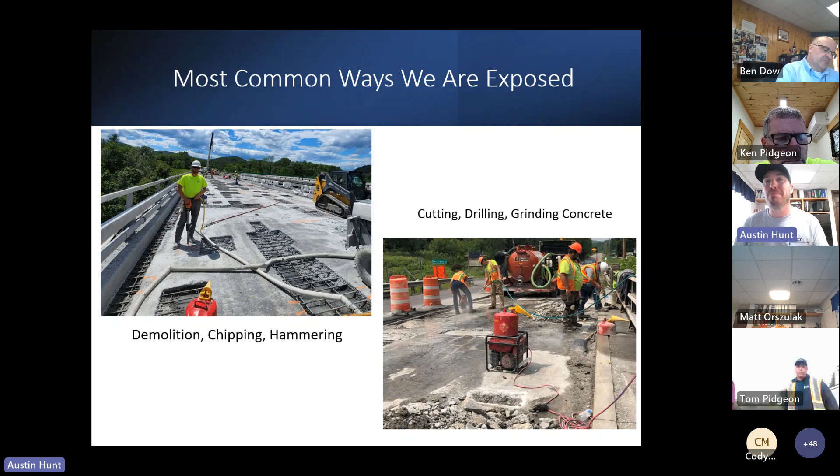We hole cut into structures, things like that. Silica dust is in any earthen, stone material, concrete. It's one of the most common minerals in the soil - it's in everything.

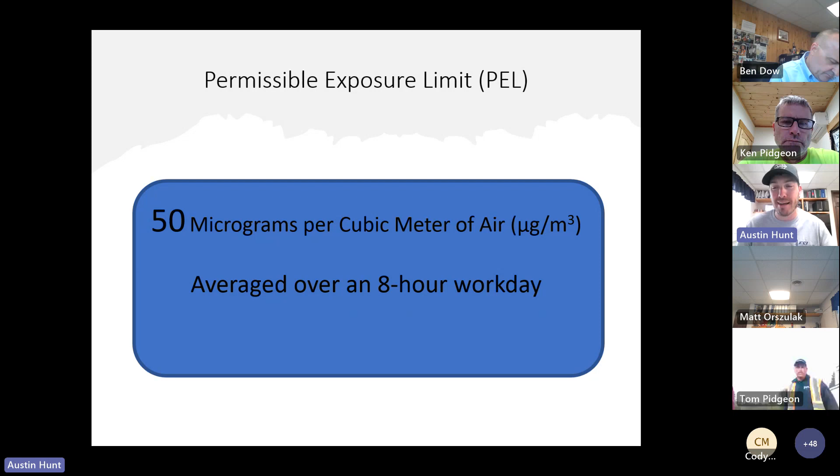So the permissible exposure limit is 50 micrograms per cubic meter of air over an 8-hour day. And for most people, they just see that as a number - they're like, I don't know what that means. So the next slide here helps get a good perspective on it.

Hey Matt, can you mute the tool crib? What's that - can you mute the tool crib? I think it's Todd Nelson. Okay, yeah, I'll mute him. Okay.

Thanks. All right, so what I was saying is 1,000 micrograms of silica here - to the left is next to a dime. They're showing it, and that is a very small amount of silica.

So in 20 cubic meters of air, which breaks down to about a 10 foot by 10 foot by 7 foot room for us Americans, that amount of silica in that room means you can be in there for 8 hours a day and no more. A lot of times silica is just one little part of all the dust that accumulates, so that room should be very dusty if there's that much silica in there. But it's actually a very small amount.

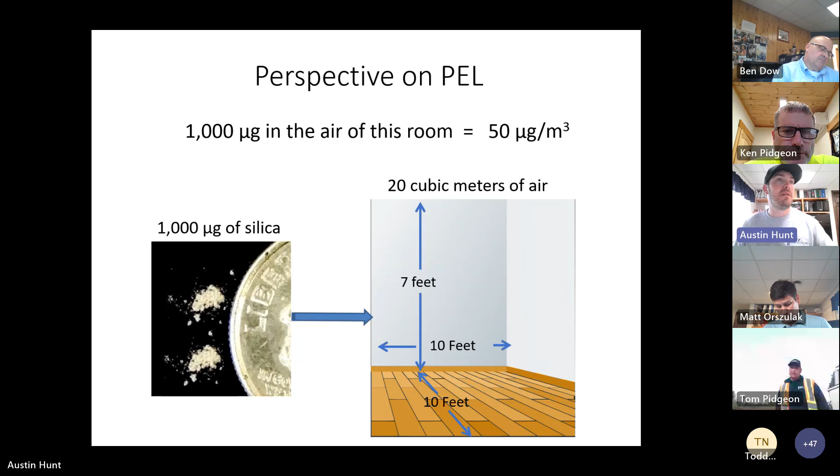So we use this OSHA Table 1 for best practices. OSHA puts this out saying this is what you should do and these are the protection measures you should take. So you can see when you're using a jackhammer or chipping tools...

with the use of water delivery and a vacuum system or something like that, outdoors, you're good to go for about 4 hours with no additional protection. After 4 hours you need an APF 10, which is a dust mask, half face mask, disposable or the reusable ones.

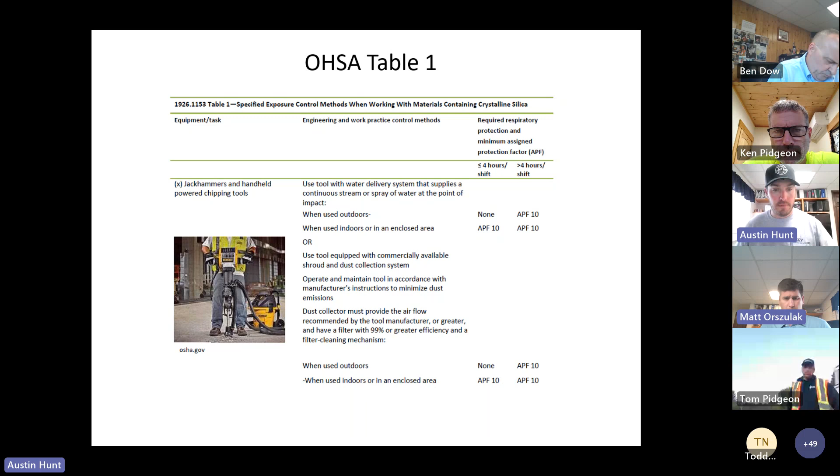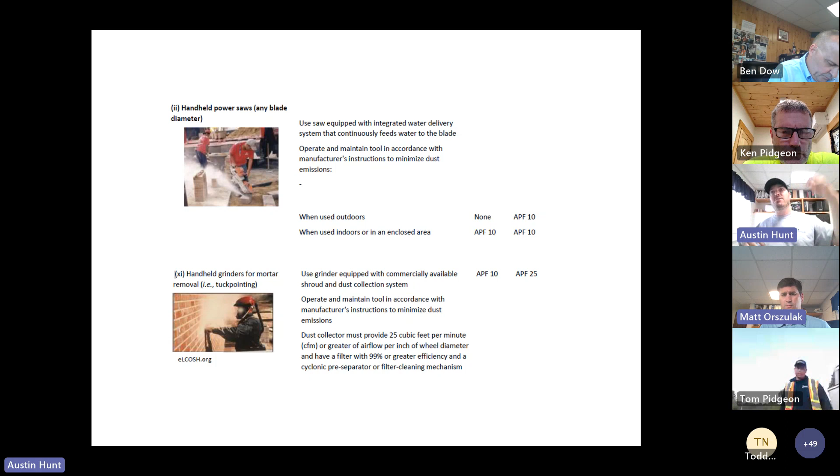So I've got them for saw cutting and grinding. There's 8 pages on this that show most aspects of construction.

So the APF 10, when you see that, this shows what they mean. APF 10 is your disposable respirators, your half face masks, and then above 25 would be your PAPRs with a respiratory hard hat, things like that, and then 50 is a full face mask and so on.

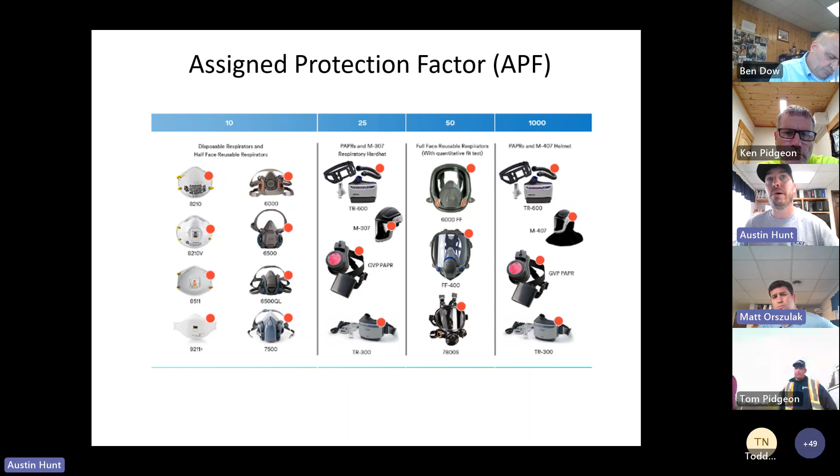If you ever have questions about silica, contact me or Matt. We can come down and test it. It takes us a couple hours to get the test, and then you've got to send it off to the lab, so it's not immediate, but it will let us know better in the future what the levels are.

And some of the health effects, why we don't want to get exposed to this, is you can get silicosis, which is basically scar tissue in the lung that builds up over time, lung cancer, COPD—it's going to swell your airways, you're going to have trouble breathing, things like that. And then finally, kidney disease.

So if you have any questions about what you're doing, you can always refer to that Table 1, or contact me and Matt, and we can come down and test that for you.

That's all we'll have. Thanks Austin, and that's why we built the JHAs the way we did. So if you check that silica box that you have that hazard, that Table 1 shows up. So our best practice is really those two methods: wet cut and vac. If we're not doing those, we must be wearing some type of respiratory protection.

Is there any questions out there on silica? If not...

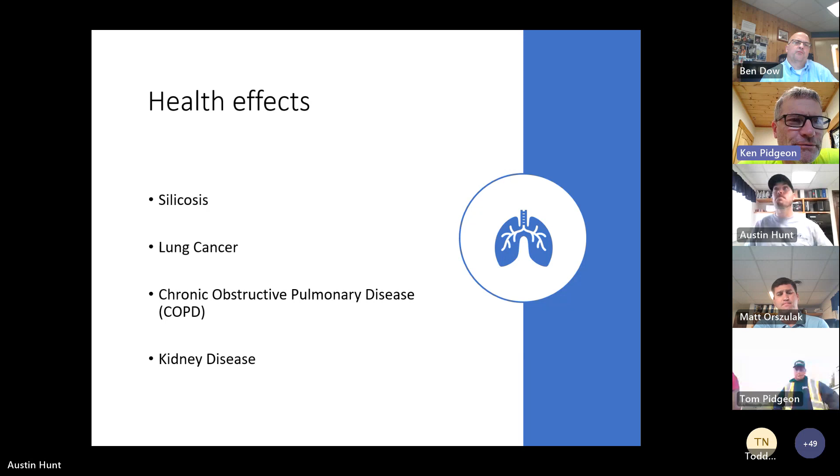Take it away, Ken. You want to introduce your newest safety guy standing there next to you on my screen? Yeah, we want to do that with the photo, or you want to do it right now? Oh, go ahead, you can bring it up. Okay, yeah, so we're pleased to announce...

Tom Pidgeon has joined ECI, and he's helping the safety team. He's going to be out there—he's already out there on the site this morning doing a nice little morning briefing, joining the morning briefing and conducting the morning safety meeting with the crew out at Essex Waterline, with Randy and Jesse and all their crew members. So we're going to have a lot more presence out there, and Tom's going to be leading that. He's a paramedic by trade...

so he's going to really help us on the injury front, helping triage, helping respond. He's also going to learn how to locate and do all the confined space work, and we're going to get him up to speed on all the OSHA requirements, and also be a trainer for us. So we're really excited to have Tom join the team and help us be safe and sound each and every day, because that's our number one priority. Safety is our best priority to maintain profitability and have a very successful company and keep our employees happy.

Yeah, I got a couple things to add, if you don't mind. Go ahead. Tommy, give a wave just so we know you're acknowledging, or is the screen frozen? He might be frozen. I think it froze.

Yeah, not great service over there in Essex. His name is Pidgeon, and he's worked here before. He's also a Marine—he was in the reserves, I don't know if he's in there anymore—but he's highly trained as a paramedic.

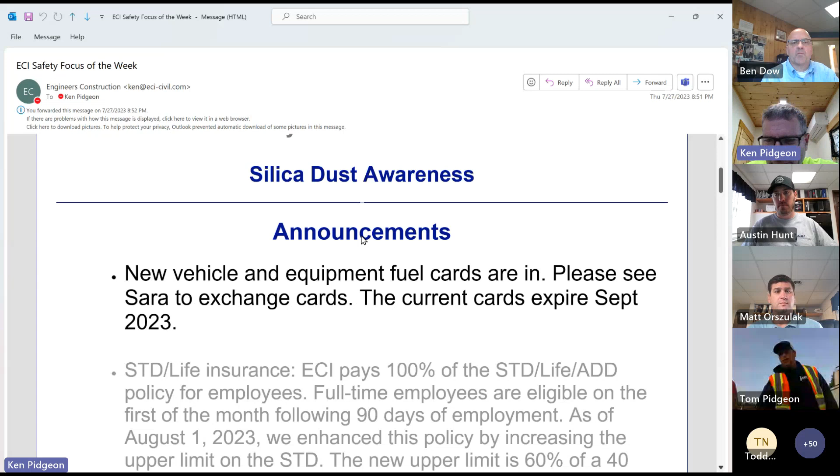Might be a lot that show up on September 1st. Yeah, but don't be that person, right? Okay, I did mine yesterday.

I left the next two announcements on here. The STD, that's short-term disability, and life insurance have some really good changes that are explained. Also, the healthcare premium holiday is still in effect. Both good things.

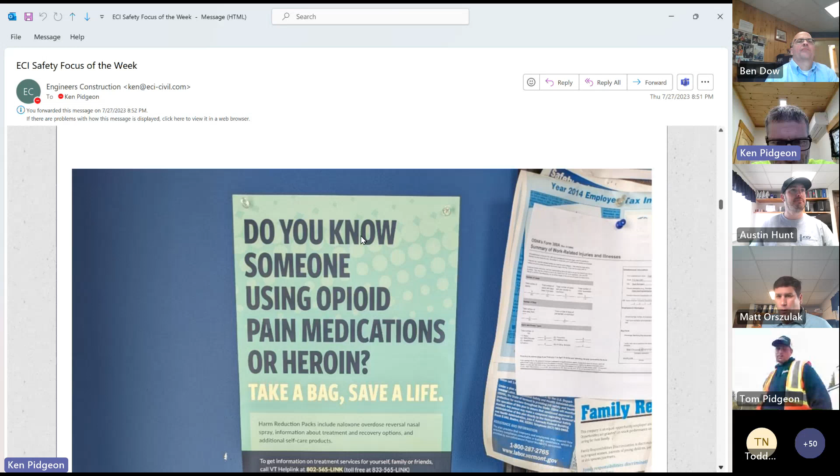So welcome new people. I've kept this item on the email, the free opioid drug help kit located on the side door of the operations building, provided by the AGC and VermontHelpLink.org. If you know someone using opioids, pain medications, or heroin, just take one of those bags. There's a little help kit in there for testing stuff and Narcan and stuff like that. Important stuff if you're in that situation.

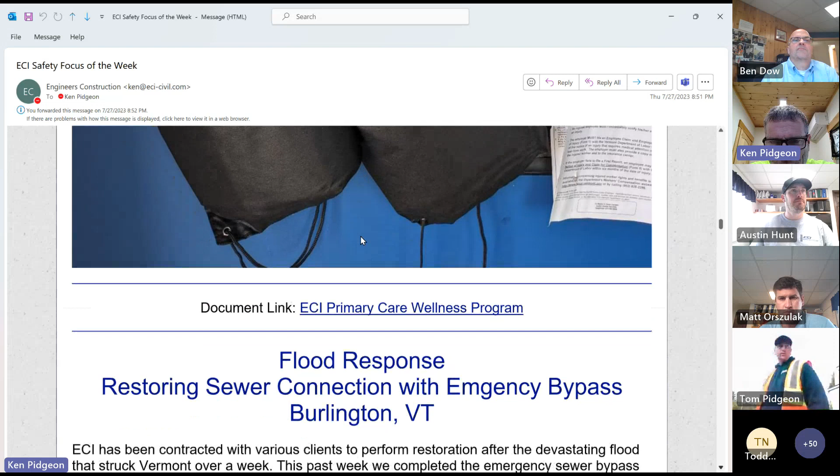I have a link here to the primary care wellness program, so if you're not a participant, please check that out.

And then we're going to talk about the flood response, restoring the sewer connection with an emergency bypass for the city of Burlington. I don't know if Ben Heath is on. Did he want to present here? Happy to, Ken. I'll take over the screen too.

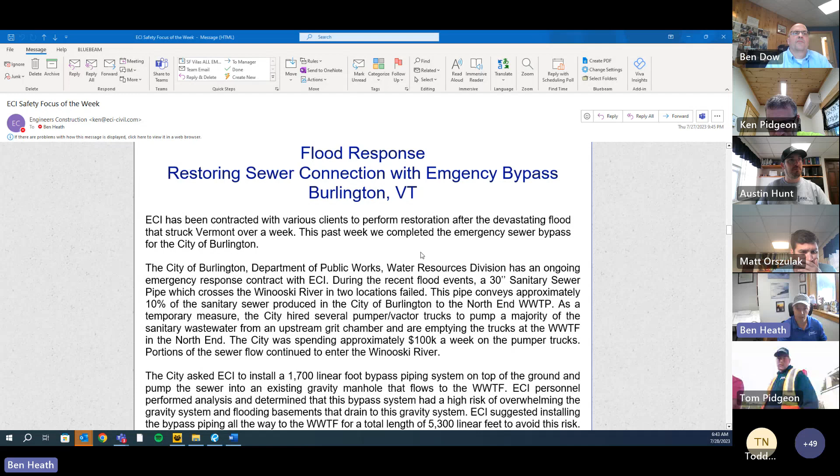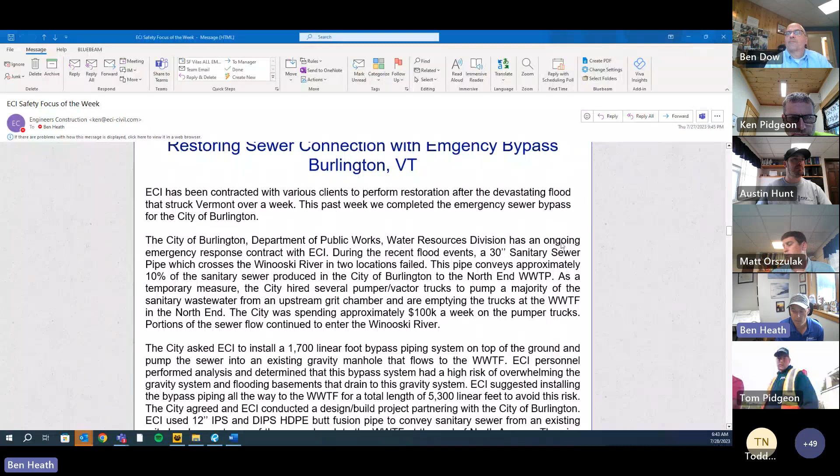So I got to bring up my screen. There we go, yep, okay. ECI has been contracted with various clients to perform restoration after the devastating flood that struck Vermont over the past week. This past week we completed the emergency sewer bypass for the city of Burlington. The City of Burlington Department of Public Works Water Resources Division has an ongoing emergency response contract with ECI.

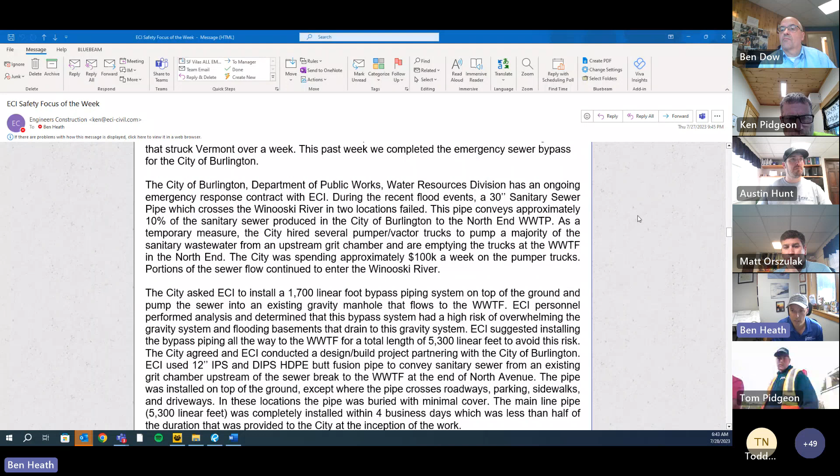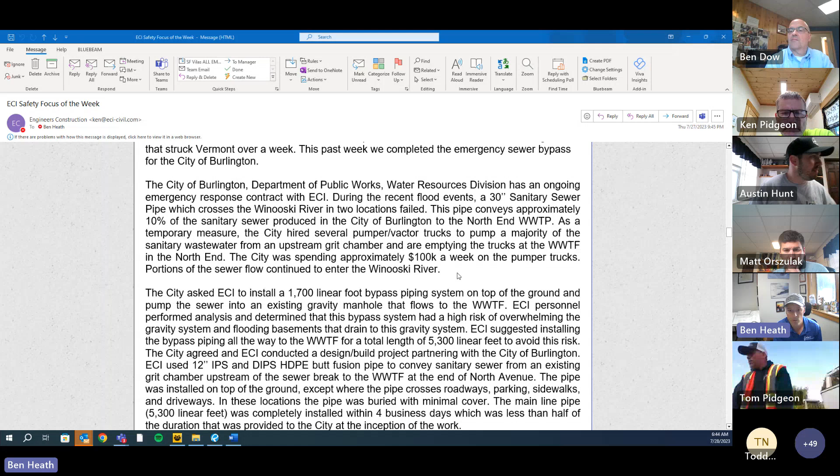During the recent flood events, a 30-inch sanitary sewer pipe which crosses the Winooski River in two locations failed. This pipe conveys approximately 10% of the sanitary sewer produced in the city of Burlington to the North End wastewater treatment plant. As a temporary measure, the city hired several pumper and vactor trucks to pump a majority of the sanitary wastewater from an upstream grit chamber, emptying those trucks at the plant in the North End. The city was spending approximately $100,000 a week on the pumper trucks, and portions of the sewer flow continued to enter the Winooski River.

The city asked ECI to install a 1,700 linear foot bypass piping system on top of the ground and pump the sewer into an existing gravity manhole that flows to the treatment plant. ECI personnel performed analysis and determined that this bypass system had a high risk of overwhelming the gravity system and flooding basements that drain to it. ECI suggested installing the bypass piping all the way to the treatment plant, for a total length of approximately 5,300 linear feet, to avoid that risk.

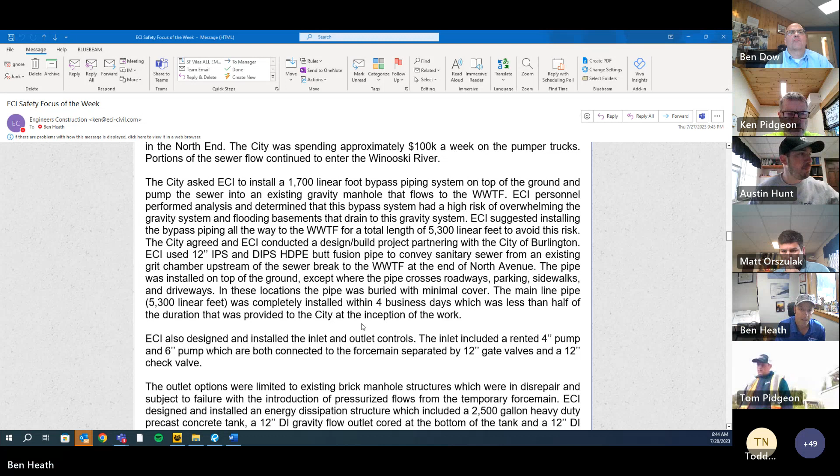The city agreed, and ECI conducted a design-build project partnering with the city of Burlington. ECI used 12-inch IPS and DIPS HDPE butt fusion pipe to convey sanitary sewer from an existing grit chamber upstream of the sewer break to the wastewater plant at the end of North Avenue.

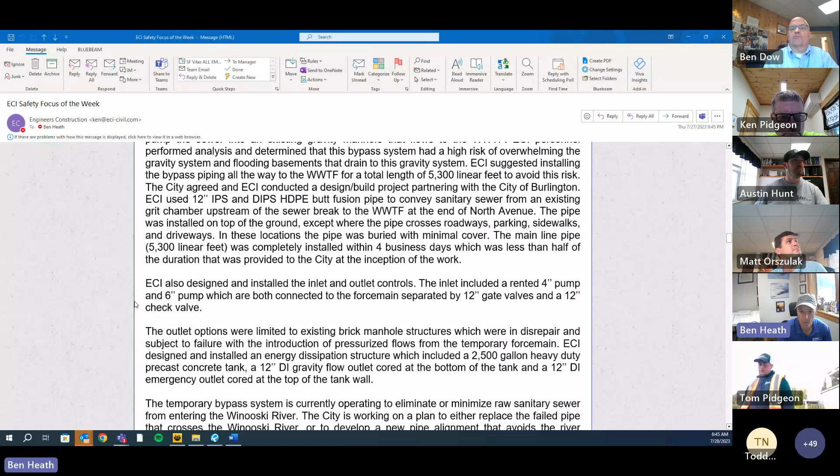The pipe was installed on top of the ground, except where it crosses roadways, parking, sidewalks, and driveways. In these locations, the pipe was buried with minimal cover. The mainline pipe, about a mile long, was completely installed within 4 business days, less than half of the duration that was provided to the city at the inception of the project.

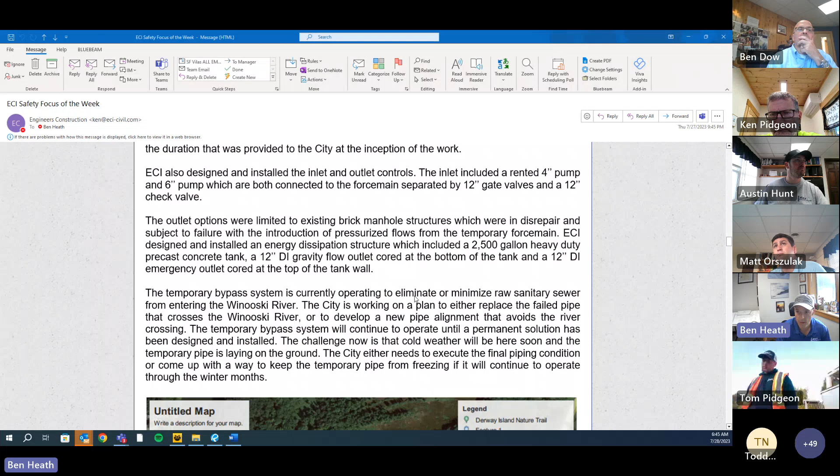ECI also designed and installed the inlet and outlet controls. The inlet included a rented 4-inch pump and 6-inch pump, both connected to the force main, separated by 12-inch gate valves and a 12-inch check valve.

The outlet options were limited to existing brick manhole structures which were in disrepair and subject to failure with the introduction of pressurized flow from the temporary force main. ECI designed and installed an energy dissipation structure which included a 2,500-gallon heavy-duty precast concrete tank, a 12-inch ductile iron gravity flow outlet cored at the bottom of the tank, and a 12-inch ductile iron emergency outlet cored at the top of the tank wall.

The temporary bypass system is currently operating to eliminate or minimize raw sanitary sewer from entering the Winooski River. The city is working on a plan to either replace the failed pipe that crosses the Winooski River or develop a new pipe alignment that avoids the river crossings. The temporary bypass system will continue to operate until a permanent solution has been designed and installed.

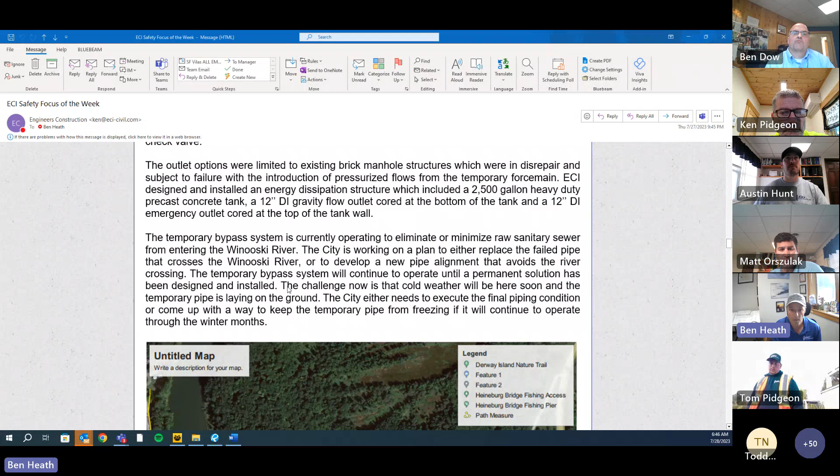The challenge now is that cold weather will be here soon and the temporary pipe is laying on top of the ground. The city either needs to execute the final piping condition or come up with a way to keep the temporary pipe from freezing if it will continue to operate through the winter months.

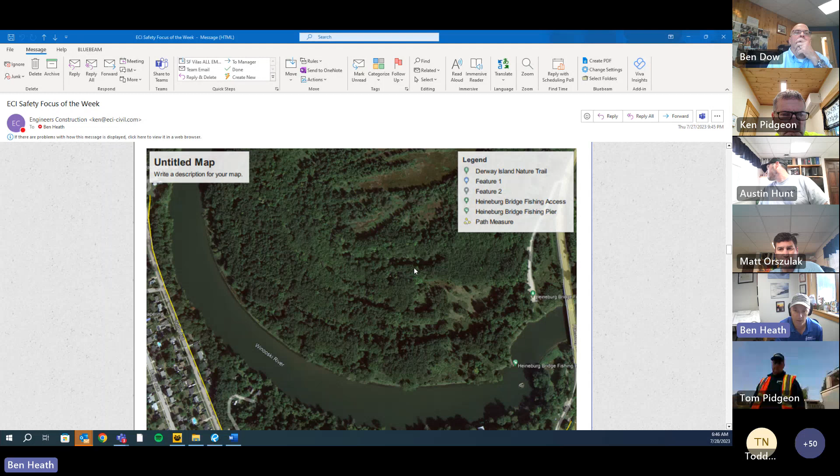I wanted to add to this narrative that this was a real team effort. We were all extremely busy and had very limited availability to assist with something of this size and scale. But the whole team, including portions of the drilling group and the civil group, really came together and scrambled to get materials here as fast as possible.

We got the call late the week of the flooding, Thursday, Friday, and by Monday we were on site with equipment already there and material on the ground, putting pipe together on the first business day available to us to start work. The city was really thrilled, and it was a good example of ECI's ability to respond to a large scale project like this.

This is an ortho photo showing the pipe alignment. On the right hand side of the screen, you can see the beginning of the system where the pumps are located at an existing grit chamber. The existing pipe crosses the Winooski River generally in this location and in this location, and the plant is located up at the top left hand corner. So the goal was to get the pipe from A to B the fastest and least expensive way possible.

We did everything we could to help the city determine a good pipe alignment that avoided asphalt and concrete, and we went through people's backyards. We dropped the pipe in the green belt. We dropped the pipe behind guardrails everywhere we could, and a vast majority of the piping system is just laying right on top of the ground.

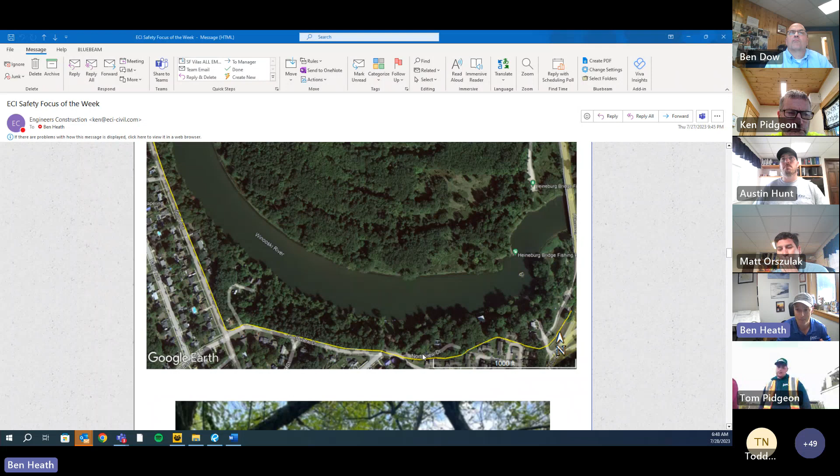Although we had a significant impact out here, we basically took over North Avenue and Northfield Drive and portions of this condominium complex. The neighbors and the folks that live there were extremely nice, and they had an overall willingness to just accept the construction abuse, and they were just happy that we were able to get this pipe in as fast as we did.

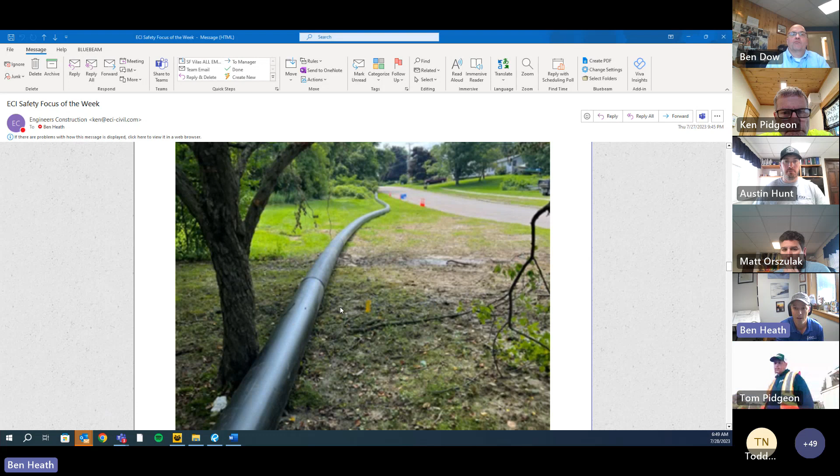This is a photo taken from near the outlet. This is generally where we started the piping work. We delivered the pipe to this location on Monday morning, and this is where we started fusing pipe together. This is a great example of what this looks like. If you drive out there, there's this black pipe just laying on the ground, working its way from the grit chamber to the plant.

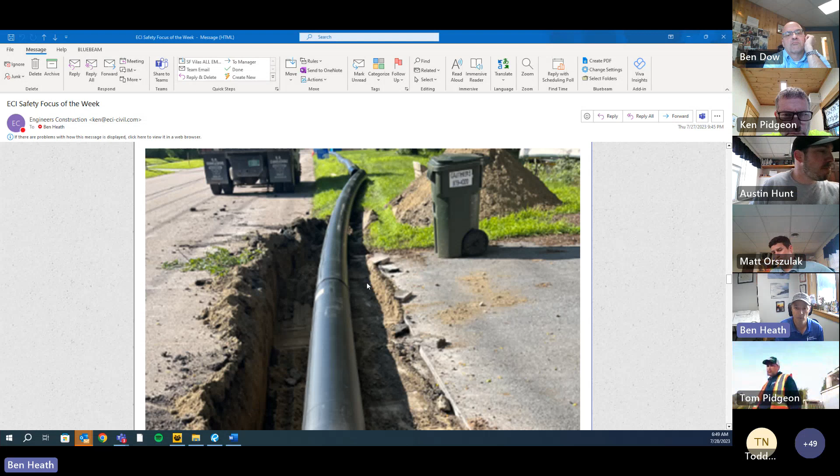Here is a photo of us going across a driveway. In some locations, there were multiple driveways in a row separated by 30, 40 feet. So we just kept the pipe down and dug a trench, getting it in with minimal cover, enough to keep the pipe down and keep the driveway moving forward.

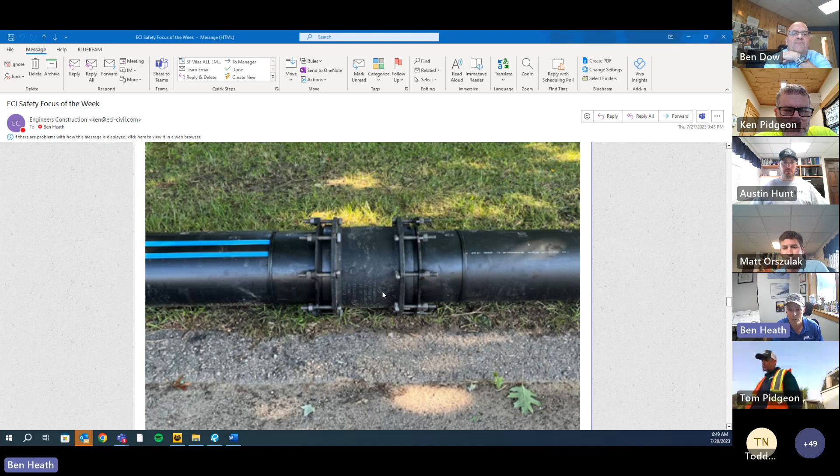We were scrambling to get all the parts and pieces there as fast as possible. On the left-hand side is a DIPS 12-inch HDPE pipe, and on the right-hand side is an IPS 12-inch HDPE pipe. Those have different outside diameters, so we couldn't get all the same pipe on site. We got a little bit of this, a little bit of that, parts and pieces scattered everywhere, and we were able to find enough adapters to make it all happen.

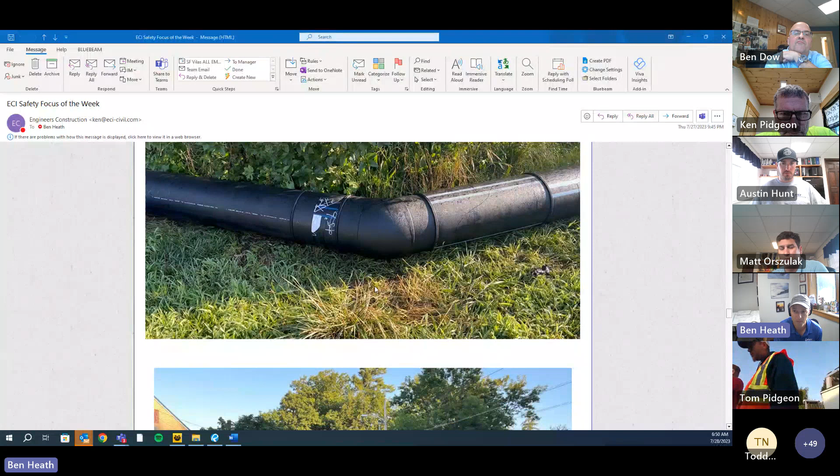Here's a photo of us completely taking over Northview Drive. We've got one lane road ahead. I think that was maybe a false sense of what was happening out there, but there's really very limited traffic on this road. This is a dead end. There's a gate right behind where this photo was taken, but here we are putting pipe together, stringing it out in the road, and eventually burying it through this section.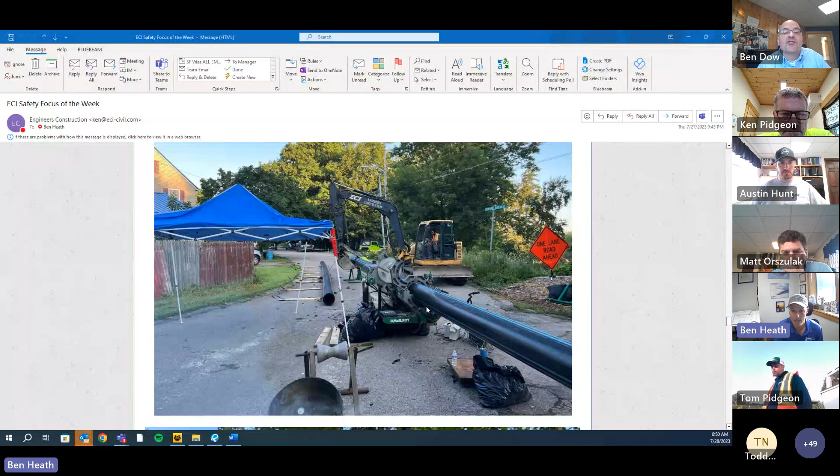So we decided, instead of blasting one of these structures with pressurized flow, that we would discharge to a heavy-duty tank. And I learned a valuable lesson on this one: nearly all septic tanks are constructed so that they have to be buried before they can be filled with fluid. So it wasn't as easy as we thought it was going to be to get a tank here. We actually had to get a thick-walled, heavy-duty tank, and fortunately Camp Precast had one out in their yard that they didn't even know about. Having a good partner like Camp, having one of the leading folks from that company go for a walk and find us what we needed, was a reminder that good business relationships can pay off at times like this.

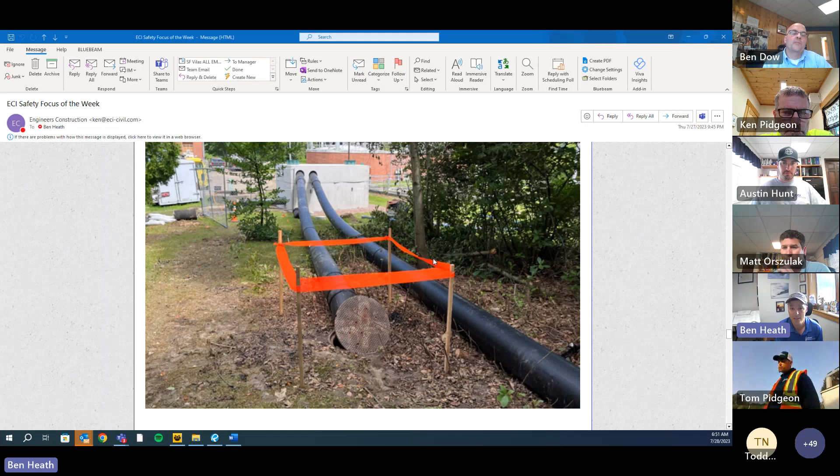So we discharged at the top of this structure. We outlet to the left down at the bottom, and then the second pipe you see coming out is our emergency overflow, which discharges back to this manhole. We don't expect that will ever see any fluid, but we wanted to have some security that we weren't going to inundate this precast tank and have a spill. So, another image of that outlet.

Did you guys core it, or did you have it cored at camp? We cored it on the spot. We had to plug, this was a setup for a gravity septic system, so we had to plug all of the existing booted holes that were in the tank and core our own holes and put our own boots in and make all the connections.

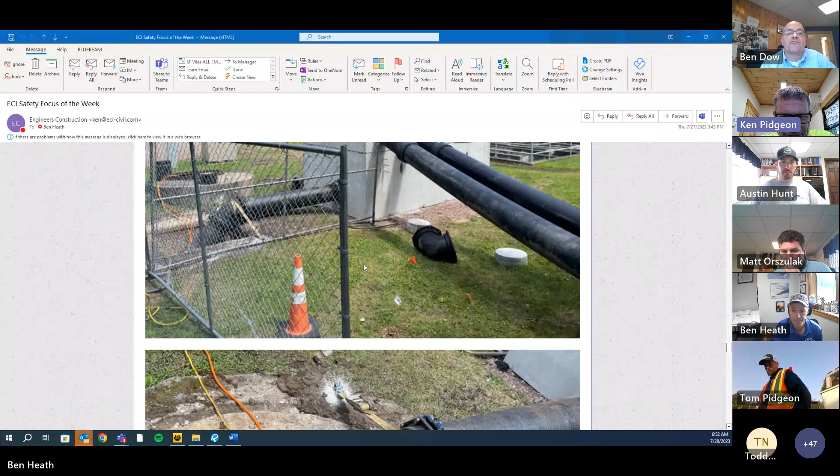There they are on the ground. Yeah, there they are. Oh yeah.

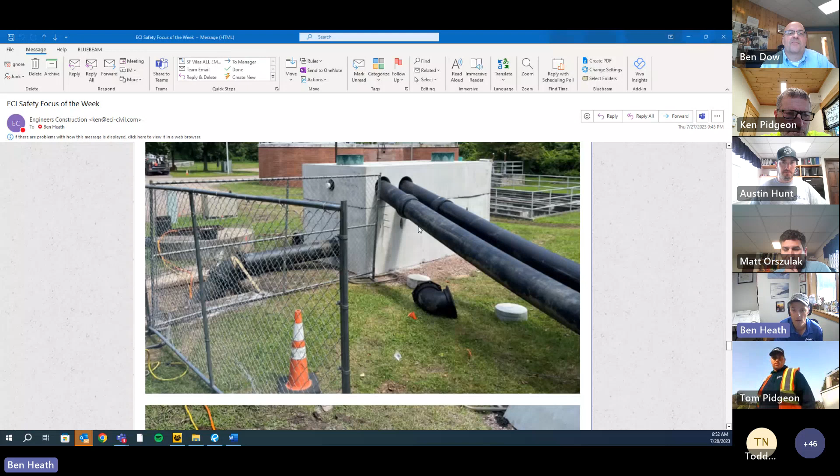Another interesting piece of this is that this piece of ductile iron that outlets actually goes all the way back to the back of the tank. We tried to prevent short circuiting since the inlet was coming in right directly above the outlet. And just for safekeeping, we ended up fastening the outlet pipe down just to keep it from bouncing around.

So in this photo here is the plug for what used to be, or what is, the inlet from the siphon that goes across the Winooski River. This is the normal inlet or outlet for the pipe that we have bypassed. Wow, so that gate didn't work anymore? No, that gate has seen better days. I'd say so. Wow.

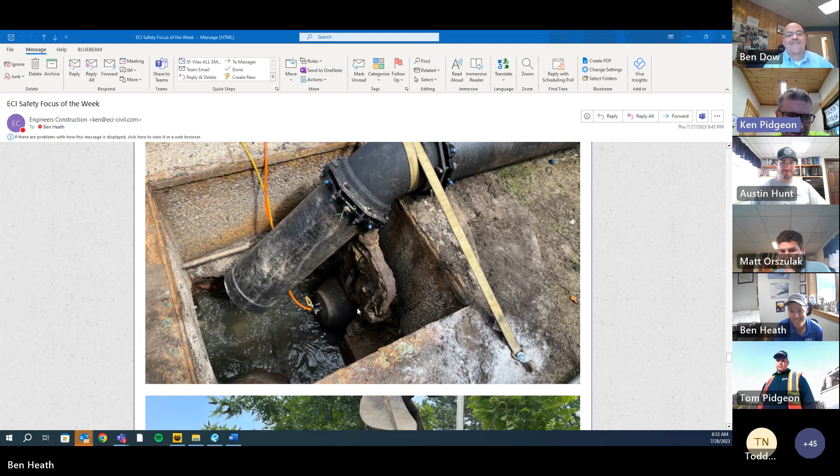Here is a photo of our team putting together the inlet controls. We wanted to isolate each of the pumps, so we ended up using 2 pumps. We wanted an extra pump plumbed in so that we could perform maintenance on one of the pumps and still be able to continue pumping.

There's significant flow coming into this grit chamber, so we wanted redundancy there. We put a check valve in to prevent backflow, because this system goes up a hill about 60-70 feet and then comes back down, so it has a nice bell curve. We didn't want to just count on the check valves and pumps to hold that back. We didn't have all the parts at the time, but we have a wet tap just upstream of that check valve so we can empty the whole system out when we're ready to dismantle it.

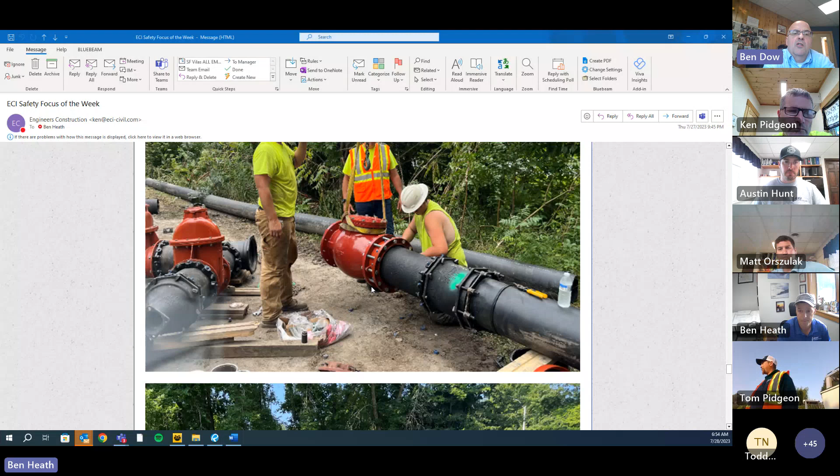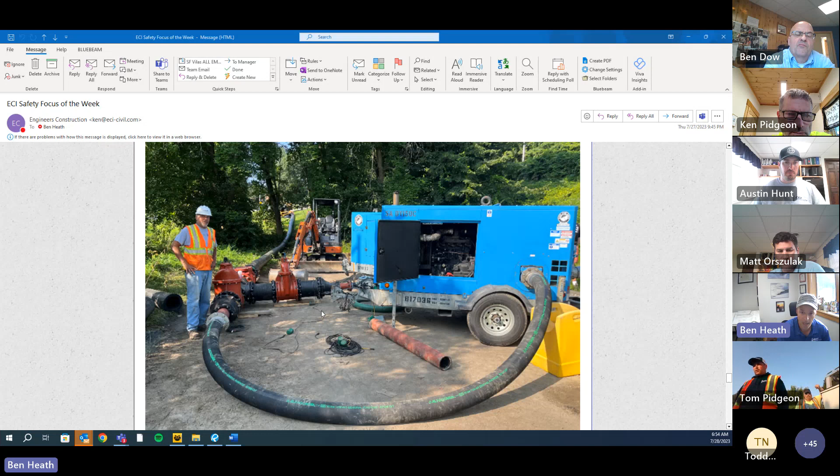Here's the finished product of the inlet with the 2 Rain for Rent pumps. We have a 6-inch pump and a 4-inch pump, gate valves on each side. The amount of effort it took to gather and figure out all these different fittings to get everything to match up, with very limited availability and a lack of time, was a real challenge, but the team put it all together and made it happen.

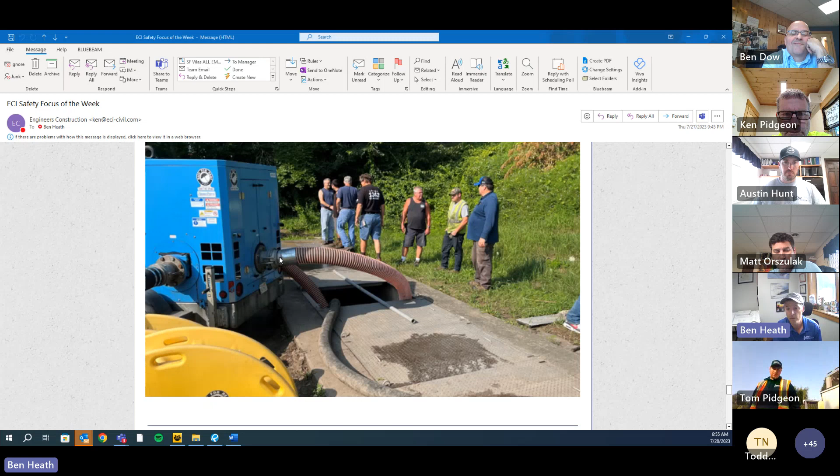From our photo archives, we have Alan Pidgeon and Mike Drescher performing a site visit to the Winooski River sewer crossing failure at the Heineberg Bridge and Winooski River in the spring of 2005. This photo shows the grit chamber we are pumping out of now. Pretty cool that I had a picture like that.

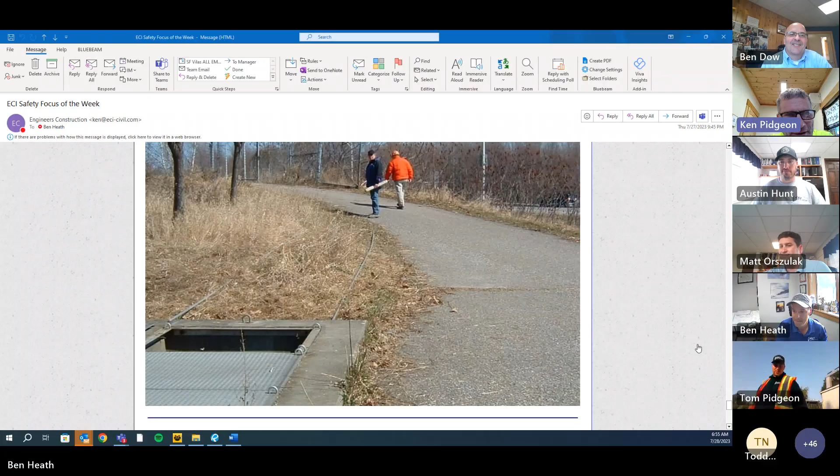So Ken, I guess I'll unshare and take it from here. Okay, I'm good, thank you very much, Ben. Great job, great job for everybody's hard participation. I think we showed up as heroes on this job. There was a lot of sewer going into the river and into the lake, so I'm glad we were able to make a fix on that. I'll turn it back over to you, Matt. Have a safe day out there, everybody. Thanks, mind if I jump on, Ken? Yeah, go ahead, Tom.

Just something to bring up: one of the truck drivers came to me yesterday evening saying a lot of the workers have been walking through their blind spots. If you're not aware of where the blind spots are on the big trucks, ask any of the drivers and they'd be happy to show you. If you're going to walk through those areas, make sure you make eye contact with them so they know you're walking through there before you do it. It's all about eye contact and awareness on everybody's part. Thanks, Tom.